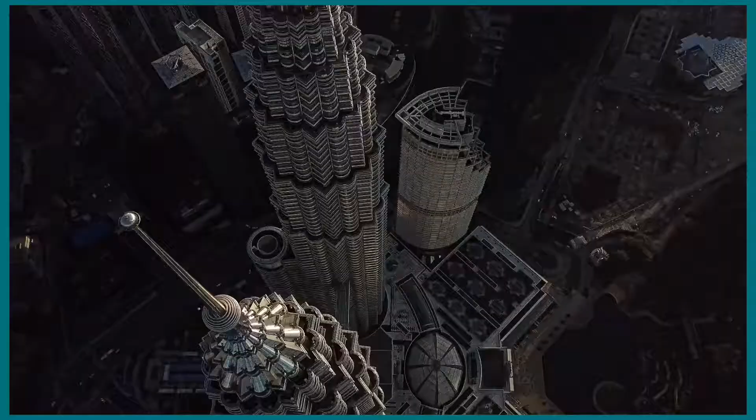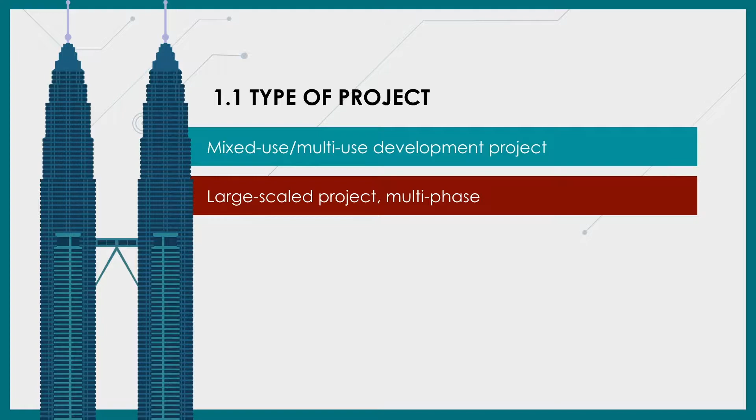My first subtopic is the type of the project. KLCC City Centre was recognized as a mixed-use or multi-use development project. The project is a large-scale, multi-phase, master plan redevelopment of a prime city centre. The idea was to create a place where people could work, live, shop and visit, as well as enjoy leisure and cultural activities in a pleasant environment. The development, together with enhancement of digital capabilities, was to improve the digital lifestyle of inhabitants.

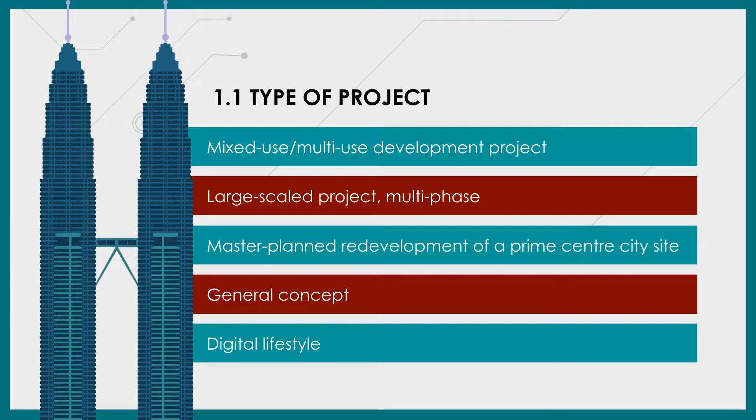As Kuala Lumpur started to portray its position as a centre of trade and business, the Prime Minister of Malaysia, Dr. Mahathir Mohamad, wished to turn Kuala Lumpur into a world-class city. KLCC was then built as a symbol of an advanced city, as well as to serve as an integrated commercial development associated with corporate office buildings, department stores and other leading business, commercial and entertainment use.

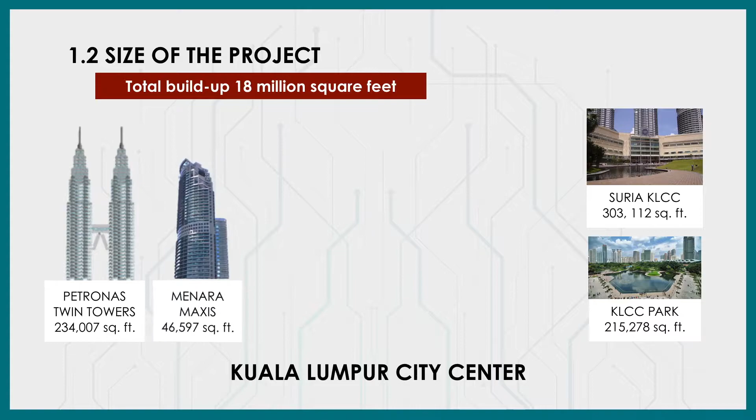KLCC City Centre consists of the 88-storey Petronas Twin Towers, the 6-level Suria KLCC Shopping Centre, and the 20 hectare KLCC Park. Other features of the project include the 49-storey Menara Maxis, 30-storey Menara ExxonMobil, Kompleks Dayabumi, and the 32-storey Mandarin Oriental Kuala Lumpur Hotel.

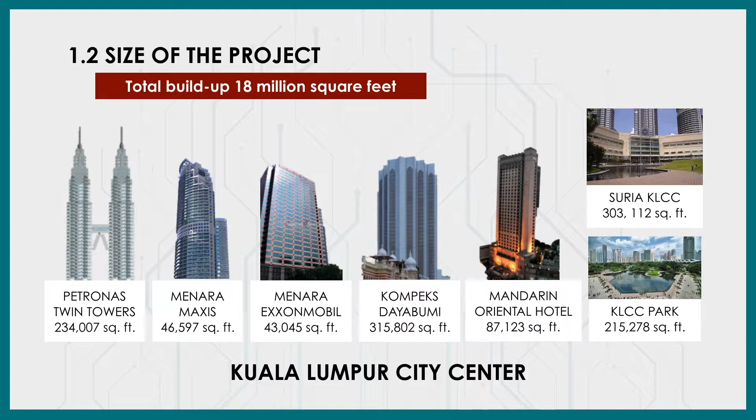The first one is the owner. The owner of this project is KLCC Holdings Berhad. KLCC Holdings Berhad makes important decisions for this project. They also need to ensure that the project outcome is as expected, because they have invested their money for this project. The other responsibility of the owner is to provide enough financial funding in order for the project to be completed on time. In case of changes, the owner needs to secure contingency funds for the project.

Next is the Master Planner. The role of the Master Planner is to plan the whole project development. As an addition, they need to provide scope of work, sketches and budget of the project. In terms of budget, they are responsible to suggest the suitable budget allotment for this construction project. Not to forget, the Master Planner needs to align their plans with the owner's expectations, because overall this project belongs to the owner.

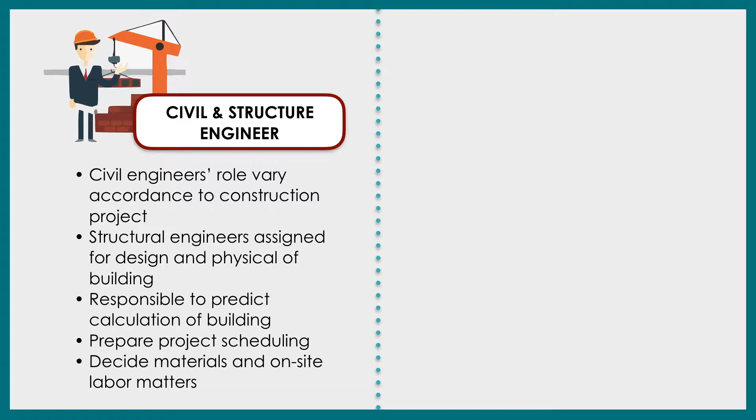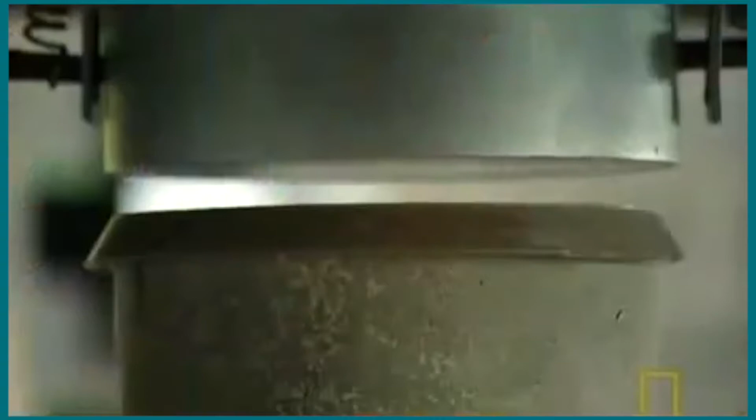Next is the role of civil and structural engineers. The role of civil engineers varies from one project to another. As structural engineers, they are assigned for the design and physical structure of the buildings. They are also responsible to predict the calculation and load borne by the building. Basically, they are responsible for the overall structure of the building. Other than that, they also need to prepare project scheduling to prevent any postponement and avoid any unwanted situation.

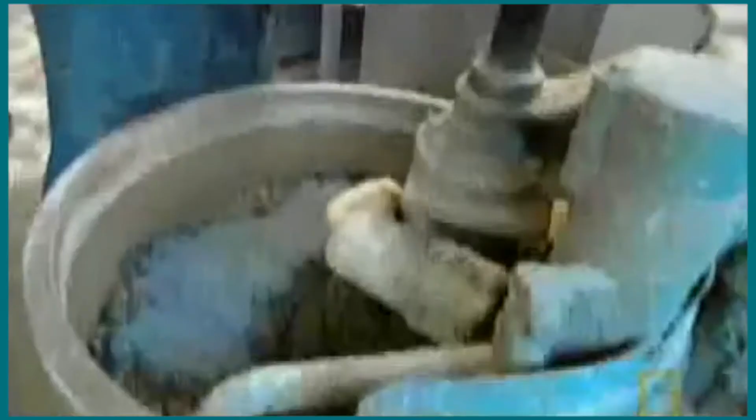The other extension of their job is to decide materials to be used for the construction project and deal with on-site labor matters. They need to ensure the workers are enough to execute the construction project.

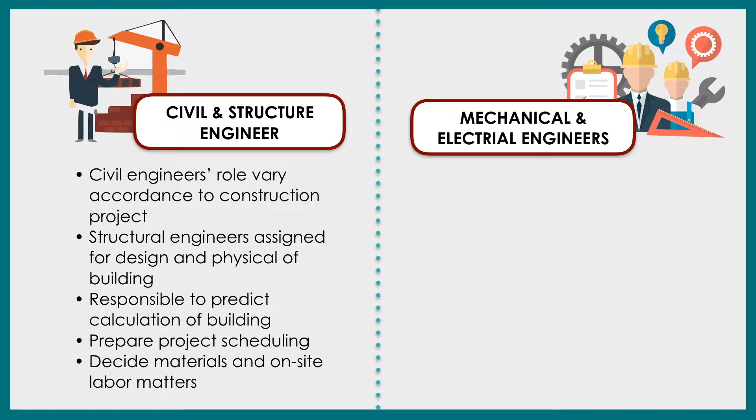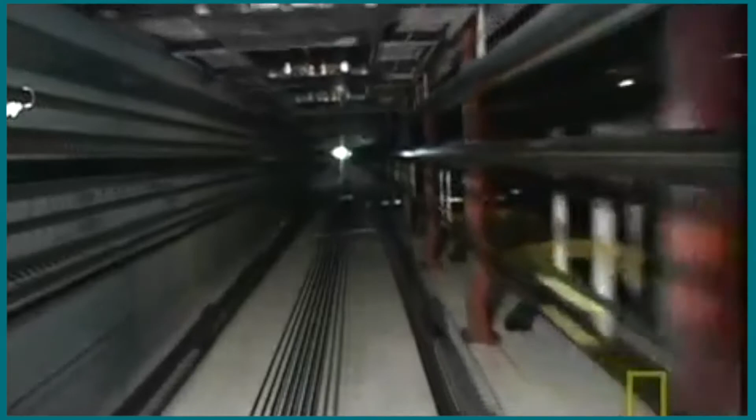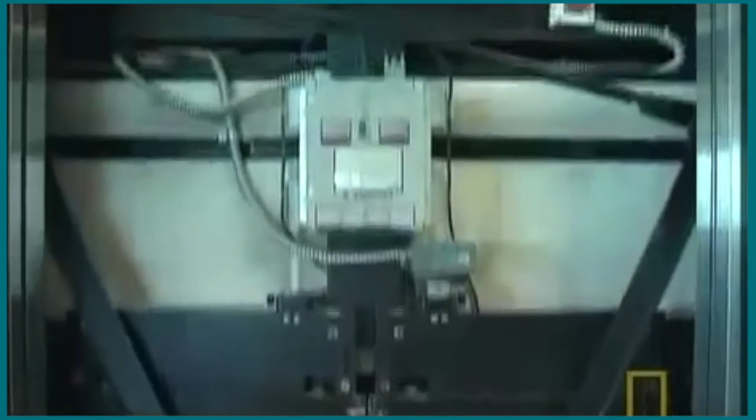The second last role is for mechanical and electrical engineers. To be exact, they are in charge of mechanical parts and also electrical components to be installed inside the building. Their job consists of installing, testing, and operating the electrical and mechanical components inside the buildings. Their role is important to ensure the comfort, functionality, and safety of the occupants.

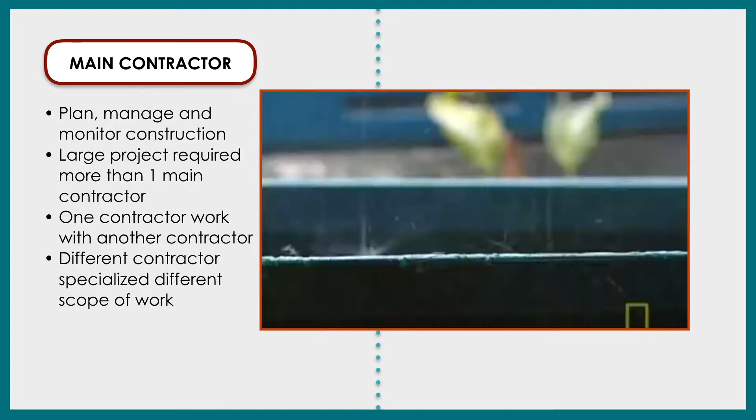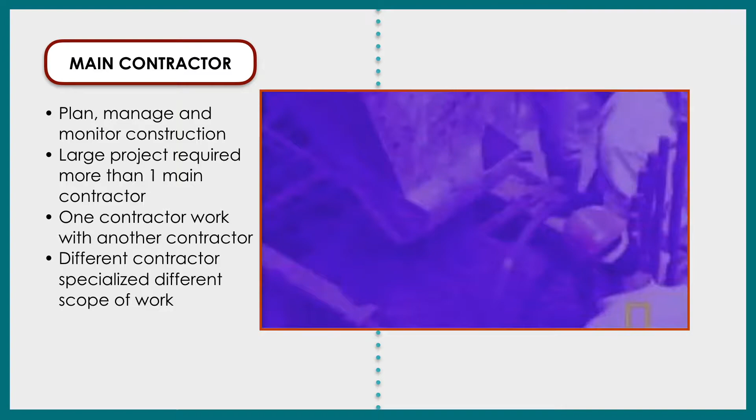Lastly, it is time to highlight the main contractor's role in the construction project. The role of main contractor includes planning, managing, and monitoring the construction progress. The reason why KLCC has more than one main contractor is because it is a large-scale project. It consists of up to 8 main contractors because the development is mixed use with approximately 40.5 hectares.

Under main contractor, there are subcontractors. Subcontractors do not directly work for the main contractor. They are rather individuals running a business based on their own expertise. Subcontractors usually work based on the contract made. It is undeniable that subcontractors have a connection with the main contractor in order for them to get the job. Working as a subcontractor, they need to follow the main contractor's orders and conduct work as per request.

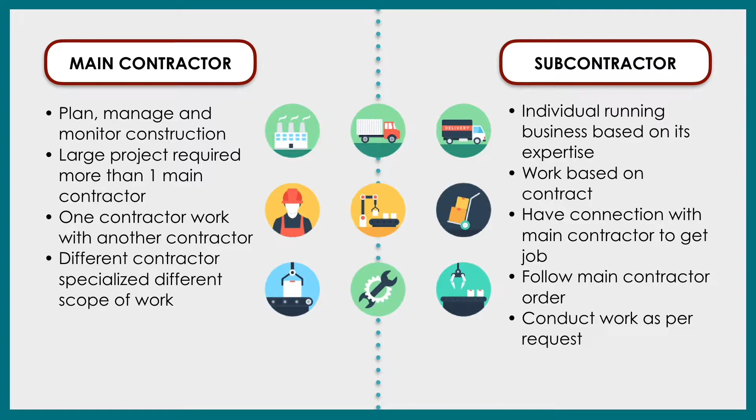There are 5 phases in KLCC's project management practice using disruptive technology, which are initiation, planning, execution, controlling, and closing. The first phase of any project is initiation, where problems and opportunities of a business are identified by the team to provide various solutions. It is also known as the concept phase or identification phase.

The project initiation activities held by KLCC were outlined by 3 processes, which are appointment of project team, project feasibility study, and project design brief.

For the appointment of project team, the first process involved was the appointment of a project manager. The project manager gave details on the job description, details on the project, and the terms and conditions involved. Later on, a selection process was held to identify the best project team for KLCC. They eventually negotiated on the terms and conditions for the job scope, and finally the project manager gave advice on the final appointment.

The initiation stage also includes a formal feasibility study to assess the likelihood of each alternative solution in achieving the benefits of the project. It is a development proposal consisting of market analysis, layout plan, and development schedule. It determines whether the project is viable or feasible in the market from a technical and business point of view.

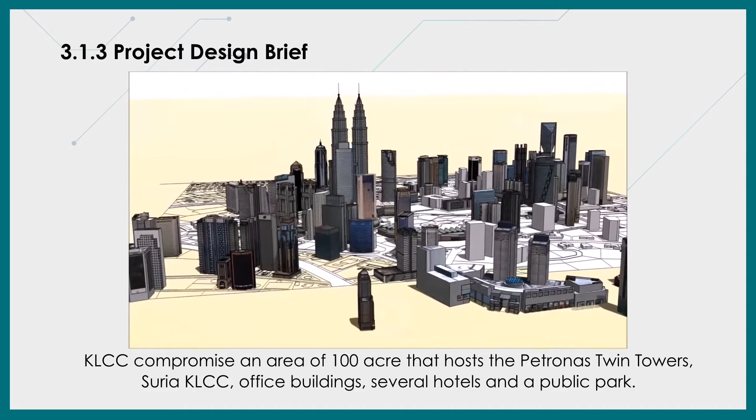KLCC comprised an area of 100 acres that hosts the Petronas Twin Towers, Suria KLCC, office buildings, several hotels, and a public park. The construction of Petronas Twin Towers was built upon the request of the previous Prime Minister for a tall and uniquely Malaysian structure.

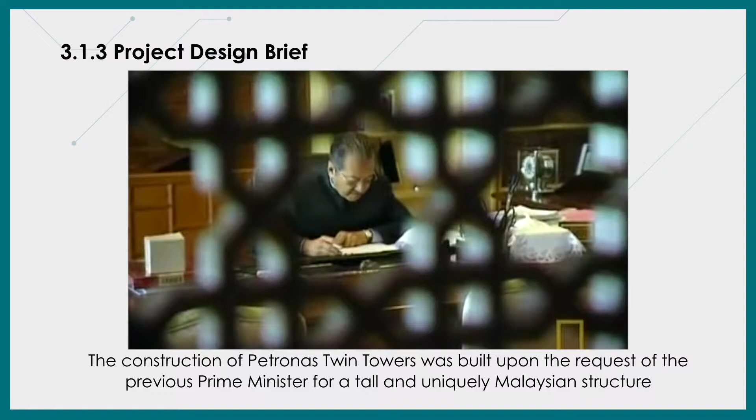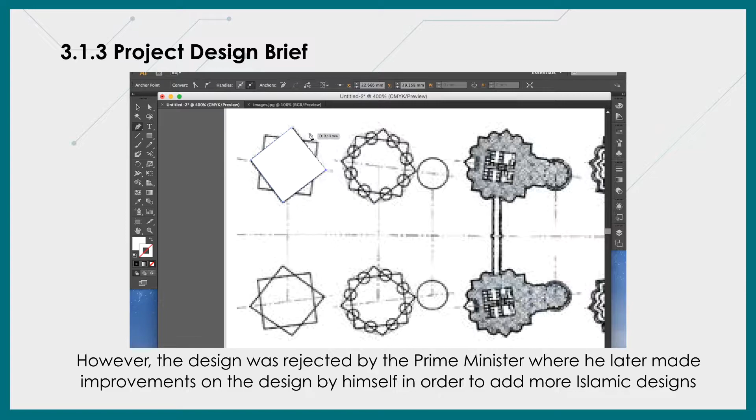Cesar Pelli proposed a revolutionary twin tower design that links with a bridge to make a symbolic gateway to the concept of New Malaysia. However, the design was rejected by the Prime Minister, who later made improvements on the design himself in order to add more Islamic designs. After 8 months, Cesar Pelli finally produced a design that pleased everybody with a semicircular scallop design to increase the gross floor area. And that is how KLCC was designed to be a city within a city.

Moving on to the planning phase, where proper planning and details are made ready to be executed. Here are the examples of project planning activities held by KLCC.

To ensure the development of KLCC is well planned, all planning activities were undertaken by the project manager starting from the year 1991. Planning for the construction of Petronas Twin Towers was strict and desperately tight. Normally, a massive project like this requires 8 years of construction period, but the Malaysian budget only allowed 6 years.

According to the project planning activities, the contract for Petronas Twin Towers went to 2 different construction companies to minimize the amount of risk encountered in the project. It was a great initiative by the Prime Minister to keep construction on track by introducing competition in a working environment.

It was said that delays after the construction deadline for the Petronas Twin Towers will cost up to $700,000 per day, with over $5 million in a week.

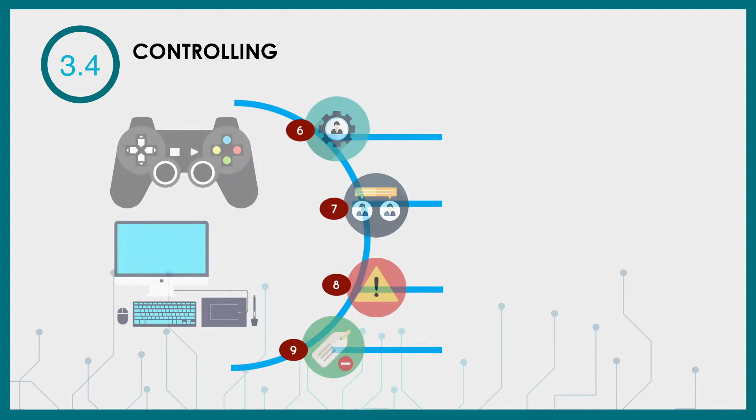Project Human Resources Management is a complete set of processes that will assist in managing, making arrangement, and leading project teams. There are 8 resource management executives and technical supervisors. The professionals for the project involve the design architect, Adamson Associates, Toronto, Canada, for the property of Petronas Twin Towers and Suria KLCC Shopping Mall in a more detailed development stage.

Then the tracking progress of the project is being supervised and the performance will be reported consistently. Furthermore, communication plays a vital part in controlling the whole process of project deliverables. For instance, using the decision tree analysis.

Project risk management involves any unexpected circumstances during the project being delivered. Effective risk management can be one of the contributing factors in avoiding any failure in the project deliverables.

Finally, project procurement management involves all the necessary purchases for the project, where it will be administered to ensure adherence to the contract being made. The contract must be administered properly to prevent any discrepancies.

In conclusion, monitoring and controlling is one of the process groups that requires a lot of attention. These steps will ensure success in the project deliverables and prevent any wrong judgment.

There are 2 types of activities which involve performing project closure and performing project completion. Performing project closure starts with analyzation or discussion on the lessons learned from the project, which may take several hours. These experiences may be used in getting feedback from the project team on the work done. This will encourage the project team to scrutinize the visibility of mistakes and success factors made throughout the entire process of the project construction.

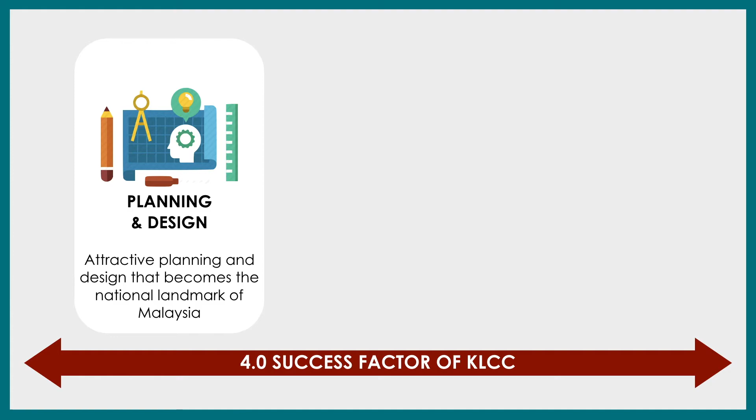The next aspect is the construction process. During the development phase of Kuala Lumpur City Centre, Kuala Lumpur City Hall (DBKL) decided to support by providing a special team to accelerate approval, introducing the KLCC Massive Fast Track Development Program. Thus, close interaction within the design team and respective statutory bodies is believed to have contributed to the success of Kuala Lumpur City Centre.

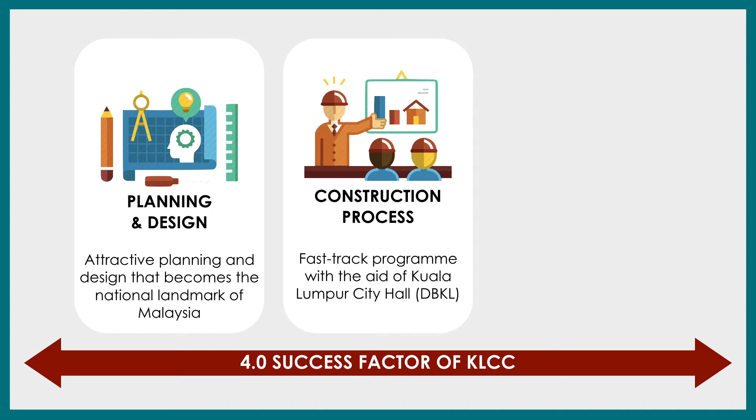The third aspect is accessibility. KLCC is located at the heart of Kuala Lumpur, thus it is supported with excellent road network systems such as Jalan Ampang, Jalan Sultan Ismail, and the AKLEH Highway.

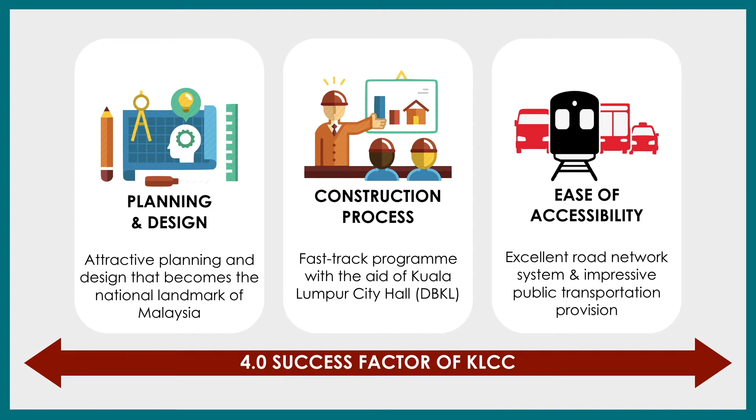Moreover, public transportation such as MRT, LRT, KL Monorail, bus and taxi are also available for people to access into the city center. Next is the marketing and tenant aspect.

It is widely known that from the beginning, Petronas has fully occupied Tower 1 of the Twin Tower. Meanwhile, Tower 2 is rented to a variety of tenants ranging from oil and gas companies to financial service companies.

Moreover, Suria KLCC has been productive and offers a balanced combination of tenants strategically positioned. The balance of restaurants, shops and services has enhanced the complex's success.

Apart from the Twin Tower and Suria KLCC, the surrounding area consists of a series of buildings for specific end users, thus making marketing easily performed within the city.

For the management aspect, the property management of Kuala Lumpur City Centre is divided into several divisions to meet the needs and use of KLCC.

Many third parties were appointed to provide repairs and maintenance for the upkeep of the facilities. Lastly is the facilities and services aspect. As mentioned before, aside from Twin Tower and Suria KLCC, the city is surrounded with mixed-use development and buildings that range from commercial to residential. This development has successfully attracted traders and investors to consider Kuala Lumpur City Centre as their choice for business purposes.

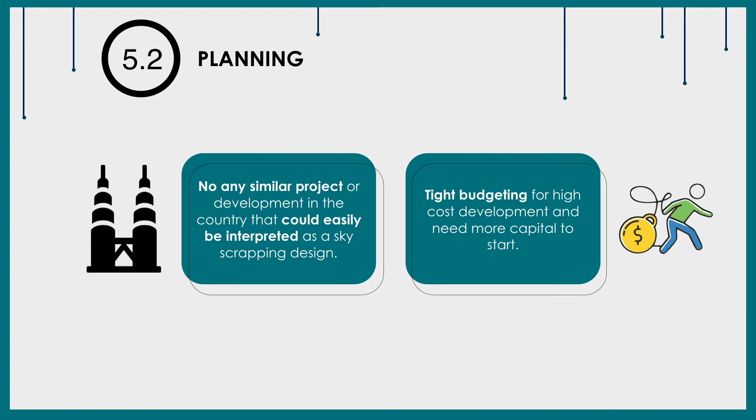Next is the execution stage, where all the planning that has been sketched up will be turned into action. They need to ensure that the project delivers the agreed objective within time, cost, and to the agreed quality. Those three elements need to be balanced across the overall scope of the project.

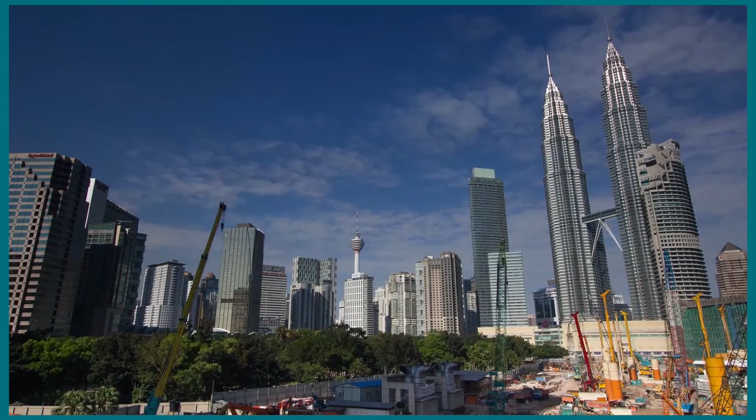Hence, the project management team needed to deal with professionals in the latest high technology systems. Since the building was developed as a world-class country building, the latest and futuristic systems needed to be developed. The problem arose when most of the sophisticated and high technology systems needed to be imported from international sources.

Moving on to the next stage, which is controlling and monitoring, the project management needs to take action to make sure all the project will be under control and adjusted on what needs to be done. The common problems arise such as not having enough laborers due to overwork on the construction site and also due to insufficient material use. Poor communication is frustrating as it can lead to poor performance and lack of teamwork.

The last stage of the project management life cycle is closing. The project management needs to do a quality check for the project before any documentation is signed off and approved by any tenants. Other challenges arise when the developer rushes for the next project after this closing process. It is common for the developer to hold many projects at one time, hence they will fail to take proper care of this project and jump into the next one.

With all of that being said, it can be concluded that the project management team of Kuala Lumpur City Centre is striving towards achieving the goals of becoming a smart city through the implementation of disruptive technologies such as IoT, large-scale data storage, rotating LED displays, and smart parking as well as security systems within the KLCC building. It can also be observed that Kuala Lumpur City Centre has succeeded in demonstrating its value in terms of urban restoration as well as serving as a well-established national landmark. And that is all from us.